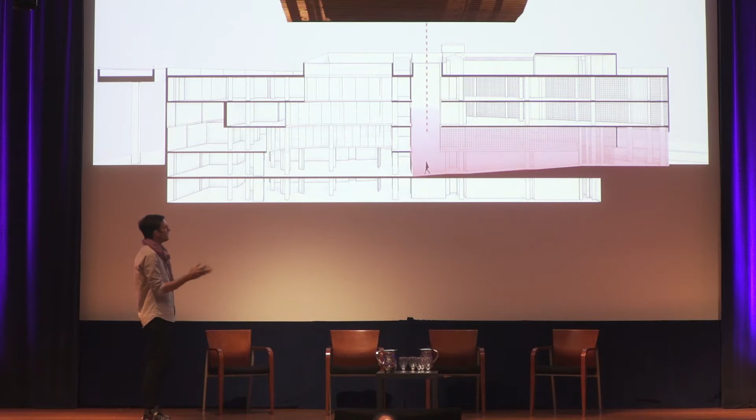What we saw was that there was this really deep overhang. So you kind of had this mysterious dark threshold that you went through. It was almost hard to see the front door. And then this really weird thing happens where you descend into the building. You walk through the front door and you immediately start going down a ramp into the guts of the building, which is a very unusual experience. From there, you have this moment of rest in the light well. You peek at something through this doorway. You come into this large atrium space, and then finally you resolve throughout the building in the workplace.

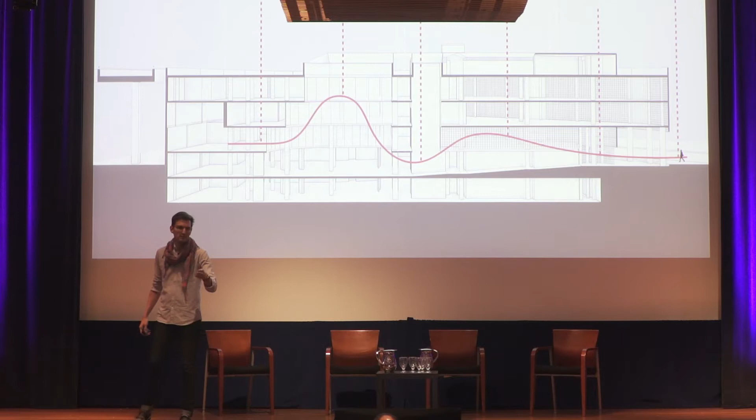And embedded in sort of the fundamental structure of this building, we saw this narrative, that it looked a lot like a typical plot structure, where you have an arc as you're moving from the front door to the space that you work. And so we said, OK, how can we take this kind of nascent narrative potential in this space and turn it into an explicit architectural experience? So we start at the front door. So this is the corridor. This is how we found it. Not really a narrative experience yet, but we thought we could do it.

So the way we approached it was we'll take both sides of the corridor and we'll stack listing rooms. Listing rooms are in-house lingo for the meeting rooms. We call them listing rooms because they're based on Airbnb listings. And so this is the office at 888. And here the listing rooms are expressed in this pretty massive interior facade, but kind of two-dimensionally. It's a bit of a full-scale diorama that you perceive as you walk into that atrium space. And so we thought, how can we make these listing rooms into something more meaningful?

And I actually looked back to the app, and I thought, OK, what is the app experience? Basically, you scroll. And how can I put your body in there so it's actually your body that's scrolling through the product that's available on Airbnb? How can I take a digital experience, for lack of a better word, and turn it into a physical one? And so we translated this into this. And so now, as you go into this space, you're kind of descending into the building with these double-stacked listing rooms beside you, seeing the variety of potential on Airbnb as you move into the core of the building.

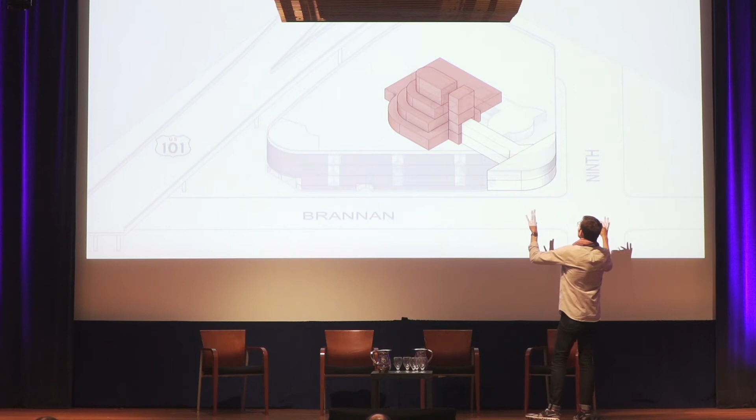And then you come into this atrium. So this atrium is unusual. It's atypical in that it moves inward as it goes up, right? The negative space kind of makes a layer cake. This is how it looked when we got it. Kind of a really strong 80s mall vibe. The columns are wrapped in black plastic.

The floor plates read super strong, so in a weird way, you couldn't even perceive the atrium because all you were really seeing were these stacked floor plates, again, very mall-like. And so we thought, okay, how can we skin the face of this and turn it into, again, an object? How do we make it into a castle? And we looked at wood slat as an option.

So that space went from this. Everyone loves a demo shot. It went to this, take it all out, to this. And we wrapped that center in these wood slats that kind of filter light, filter the movement beyond, and really give the center of the building an identity.

The reason this was important, aside from just the architectural reasons of being able to perceive the verticality of the space, the other reason it was important is that a triangular building is very confusing to move around. We, in the West, have lived our entire lives in rectangles. And the second you put somebody in a chamfered triangle with no right angles, they're instantly lost.

And so the castle is viewable from anywhere in the office. So you always know where the center of the building is. You can always move back to the staircase, to the elevator, to that vertical circulation. You can see a peek of it here, but the other thing we saw is that aside from being phenomenally dark for an atrium, there was also a lack of visible connection between the floors. So you kind of walked in, but it was unclear how you would get up and down in this building.

So we start with Buenos Aires, and basically this is sort of a material palette exercise, right? Choosing materials that represent that city, that give you a sense of the character of that place, and that really feel distinct from each other. So Buenos Aires, Kyoto, Jaipur, and Amsterdam. I'm going to talk a little bit about Amsterdam.

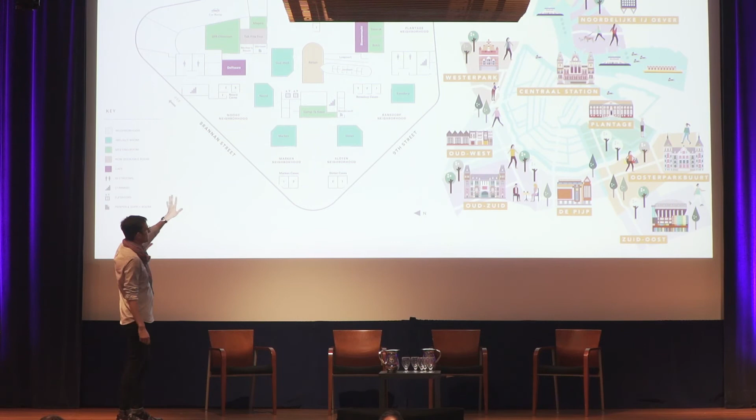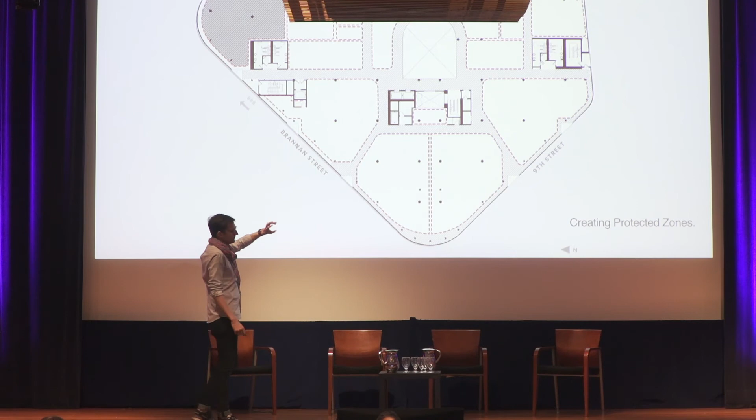So this gives you a sense of the plan, again, this kind of odd shape of the building. And you can see how we're relating the neighborhoods in Amsterdam to the neighborhoods on the floor. So the idea here is that by moving these neighborhoods away from the center, you create this natural hub. So the center of the building functions as this primary circulation hub that people always move back to.

And then if they want to go to their workspace, they peel off from that hub and they connect into their neighborhood. The power of this is that you don't get building-wide traffic ever moving past your desk, right? If you want to go to your desk, you're peeling off of this main path, and so are other people. So there's no distraction from the circulation in the building.

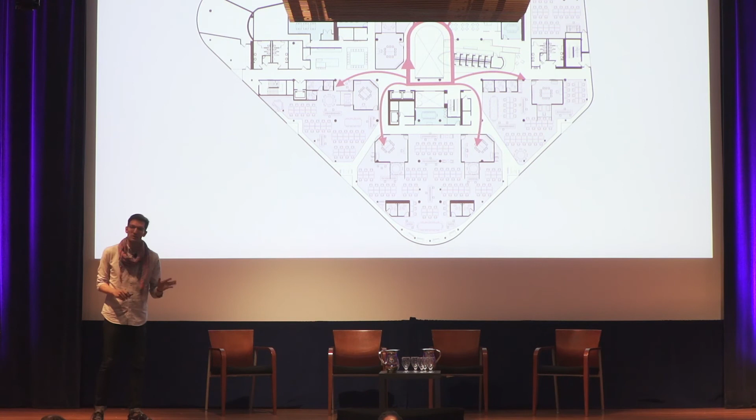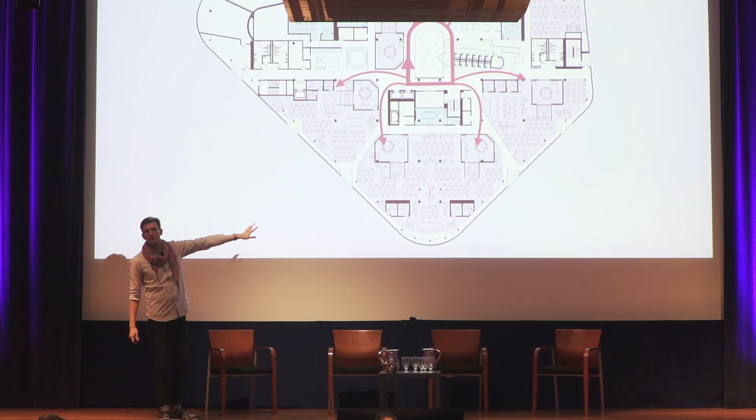This by far has been the most success. Even though this building's groovy, has a lot of cool-looking things, the true success of this building is actually this plan and this ability to protect people's workspace from the traffic of the building. And again, you can see the density, right? Very highly dense workspaces that are very quiet and feel very private from each other. So when you work here and you want to go there, you don't meander through other people's neighborhoods, you move back to that hub and connect to that other neighborhood.

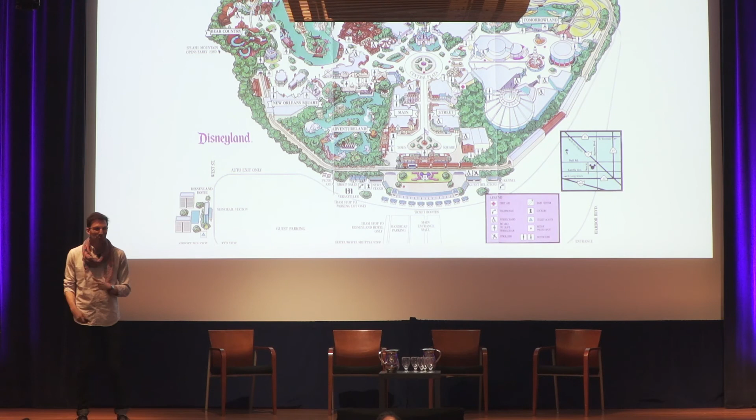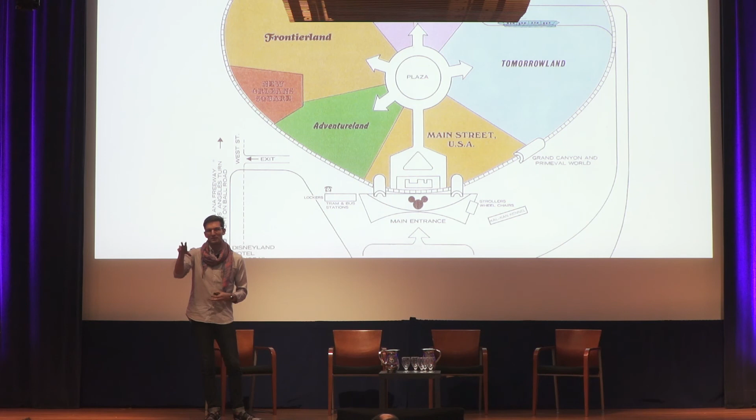For those of you who are true Disney fanatics, you may have noticed that this plan is very similar to the plan of Disneyland. This is a fluke, I think. I wasn't there at the inception of the building, but it is kind of amazing that it's the similar shape, but it's also the same logic as Disneyland. So Disneyland has this Main Street USA, which is this primary access point. It connects you to that plaza where there's that 1.5 scale Walt Disney holding Mickey's hand in gold or something.

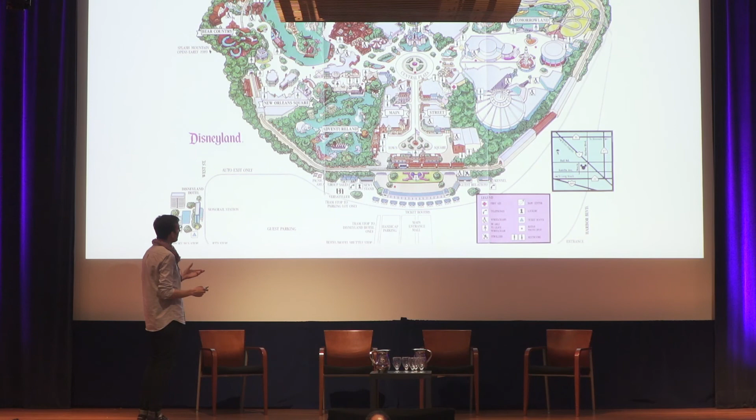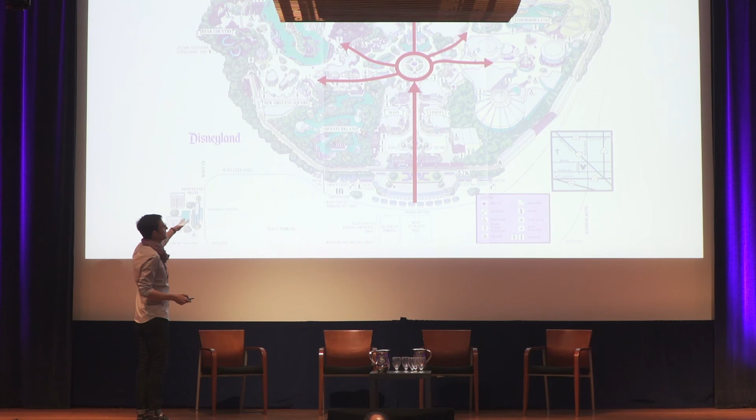And then from there, you peel off into the different lands. And what's really powerful about that is that, much like the office, you don't have to migrate through all the other territories to go from Tomorrowland to New Orleans Square, right? You simply move back to the circle and then move back across. And it also creates a sense of isolation in each of those lands. So even though Disneyland is quite small, you get a real sense of transporting to a different environment because of this hub and spoke model.

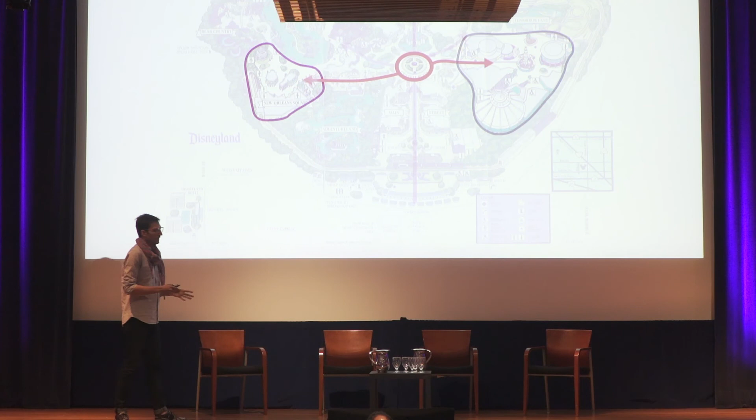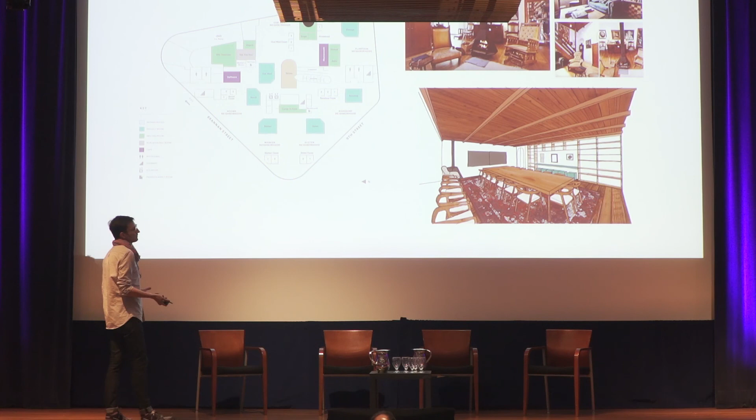I'm going to show you guys just a couple places on the 4th floor, on this Amsterdam floor. So the boardroom was based on this Stellenbosch South African listing. This is how it ended up playing out. The cafe space is based on the Bloemen Market, the tulip markets that are next to the canals in Amsterdam. And you can see how that's expressed through this kind of warehouse ceiling form with these skylight panels, these polygal panels. And then finally, there's a boat. You got to have a boat.

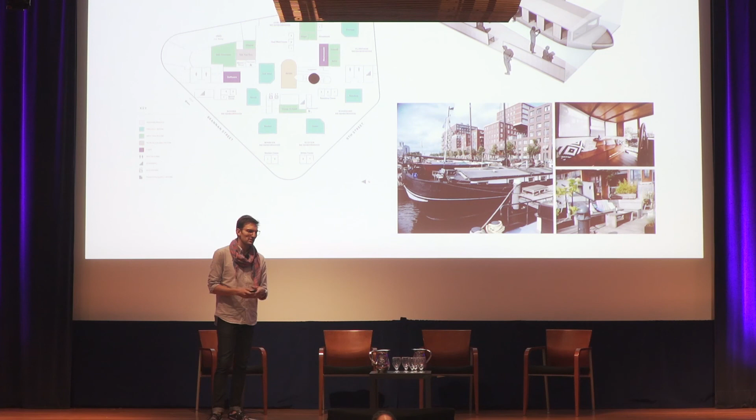And the boat, which you guys may have noticed in the other photos, actually pushes through the glass into the atrium and sort of announces itself to the whole building, hopefully inspiring circulation. It's this curiosity up above you that maybe you want to go check out when you enter the building. And then it contains these little one-person spaces, which are by far the most popular spaces in the building. It turns out people love putting themselves in a little cubby. And we really can't build enough of them. But you can get a sense of how it plays against that glass and how it works in the space.